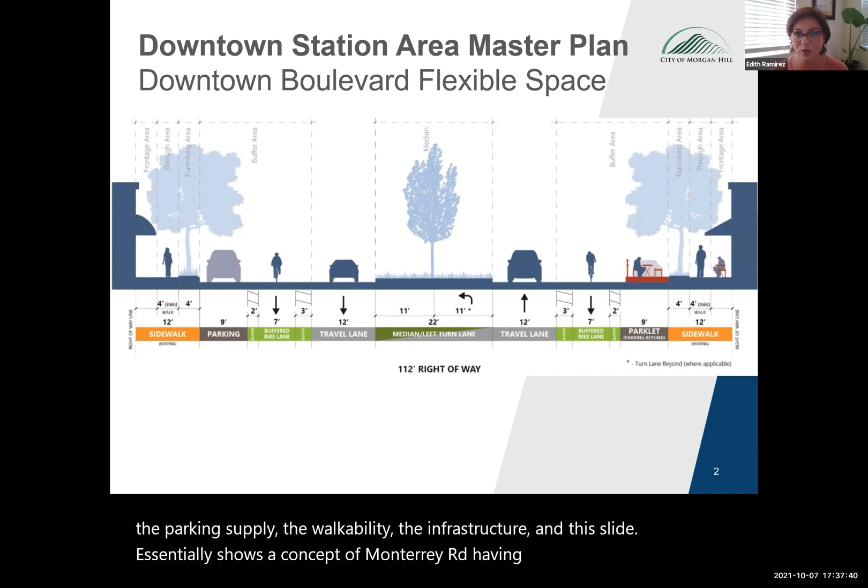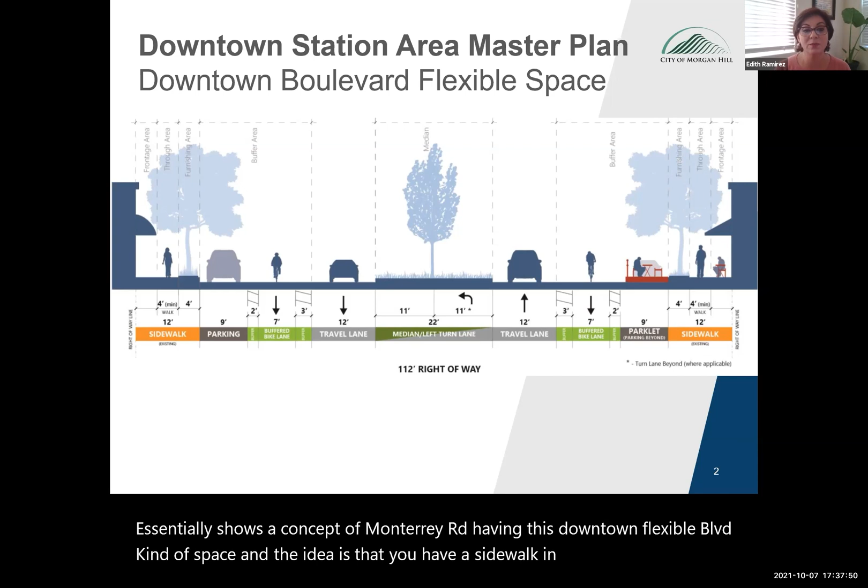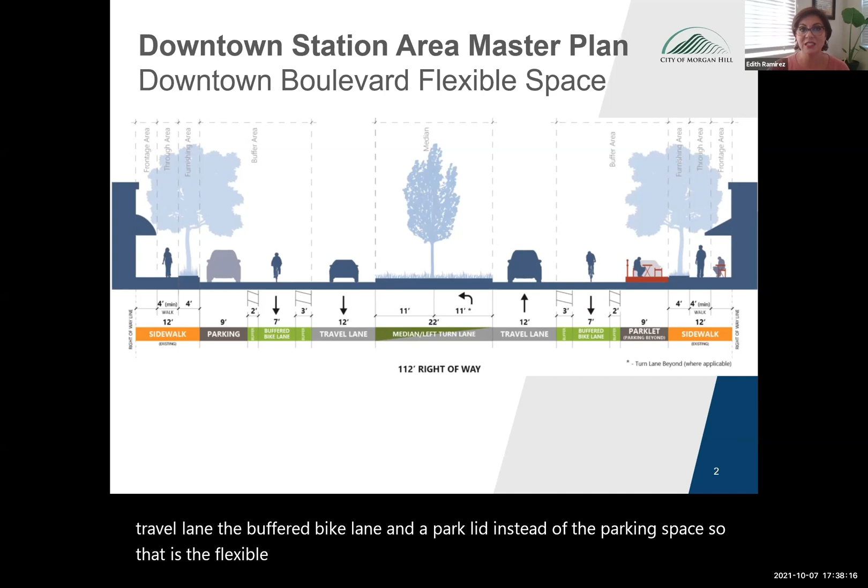And the idea is that you have a sidewalk in areas, you have parking, and then next to that, a buffered or protected bike lane, and then the travel lane with the median in the middle. Alternatively, if you continue through the spectrum, you could have the travel lane, the buffered bike lane, and a parklet instead of the parking space. So that is the flexible space that the Downtown Station Master Plan identified.

So the project that we are providing an update for is the Downtown Lane Reduction and Beautification Project. The City Council approved and provided direction for staff to begin the design work for a project that improves accessibility, increases safety, creates additional space for community members and businesses.

Additionally, the project is supposed to have a place branding beautification component that creates a barrier between the bike lane or the people lane with the use of trees and planters and other elements to support beautification and consistency through the downtown. We can accomplish this project by having some guiding principles that we shared with the council.

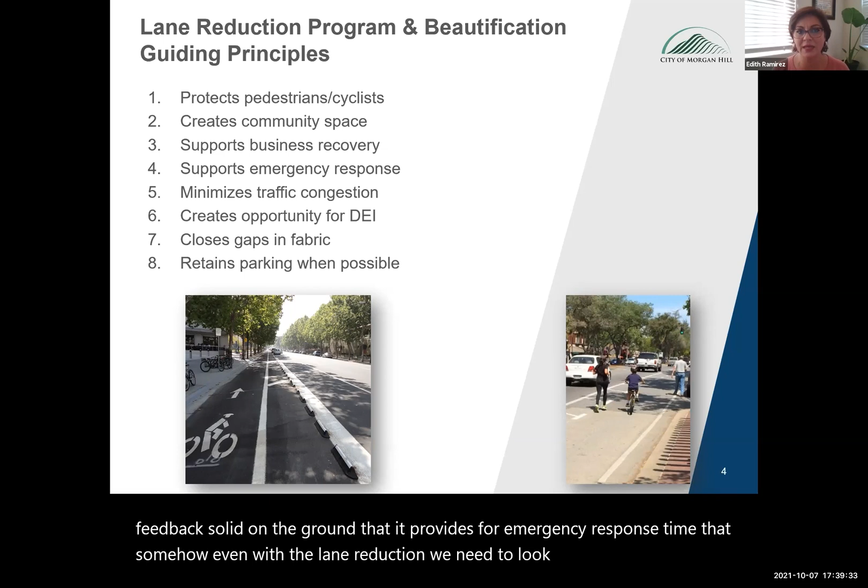A project that protects pedestrians and cyclists, creates community space, also supports the businesses that are trying to get their feet back solid on the ground, that it provides for emergency response time, that somehow, even with a lane reduction, we need to look at how to minimize traffic congestion and create opportunity for diversity, equity, and inclusion throughout the district.

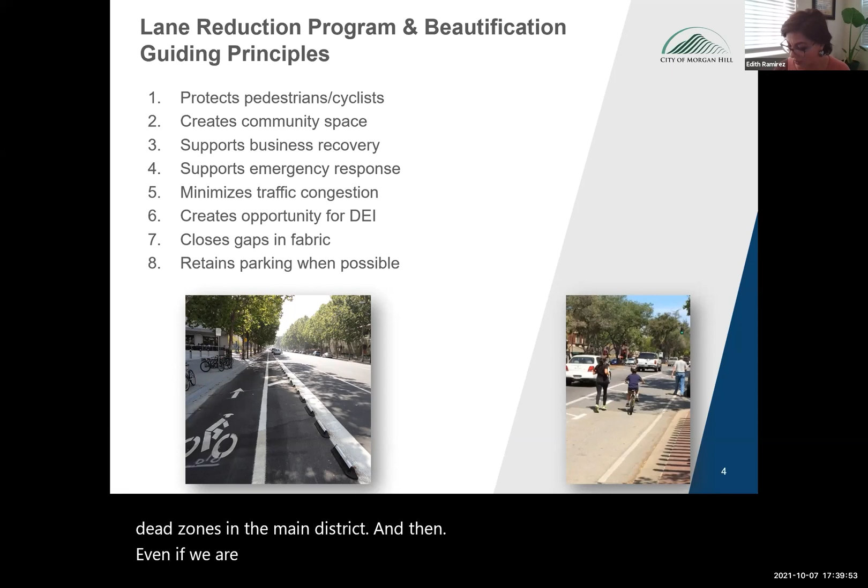Find ways to close the gaps where we don't have retail and there's dead zones in the main district. And then even if we are creating parklets and community space, how do we retain as much parking as possible?

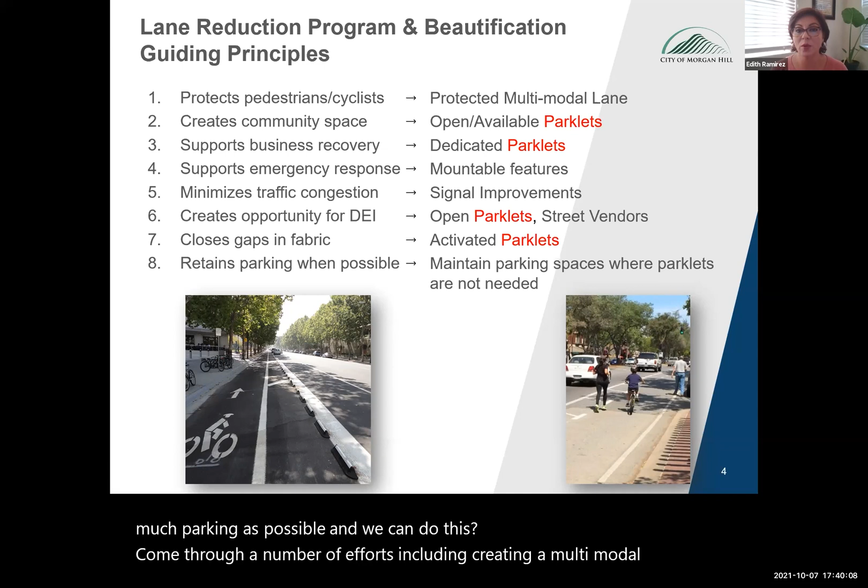And we can do this through a number of efforts, including creating a multimodal lane, open available parklets, dedicated parklets, looking at the way that we implement the project with mountable features so that our emergency vehicles can get through in case of an emergency. We can minimize congestion by looking at our signals and figuring out how we can maximize the traffic flow through the signal network.

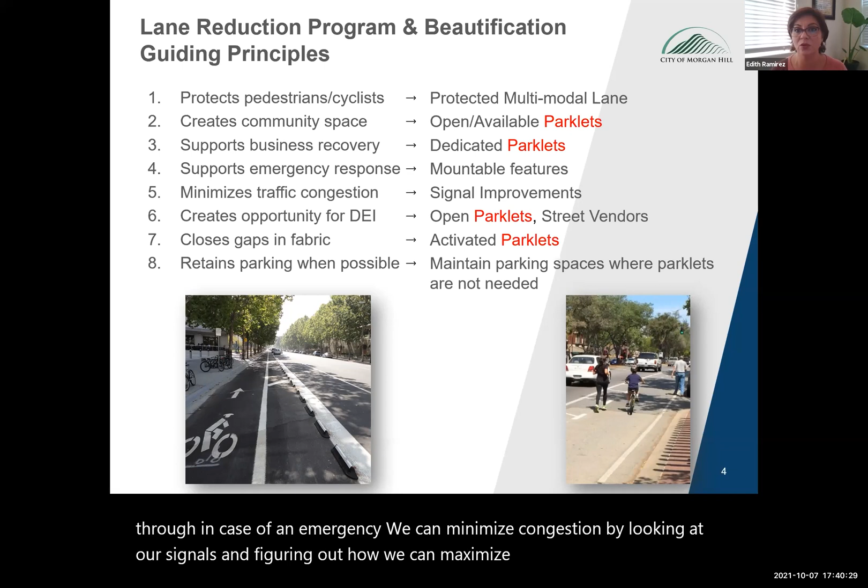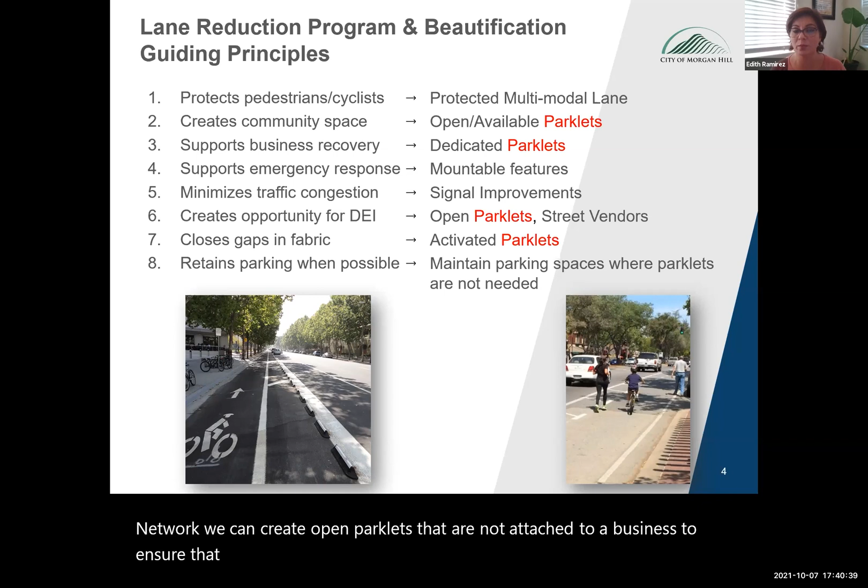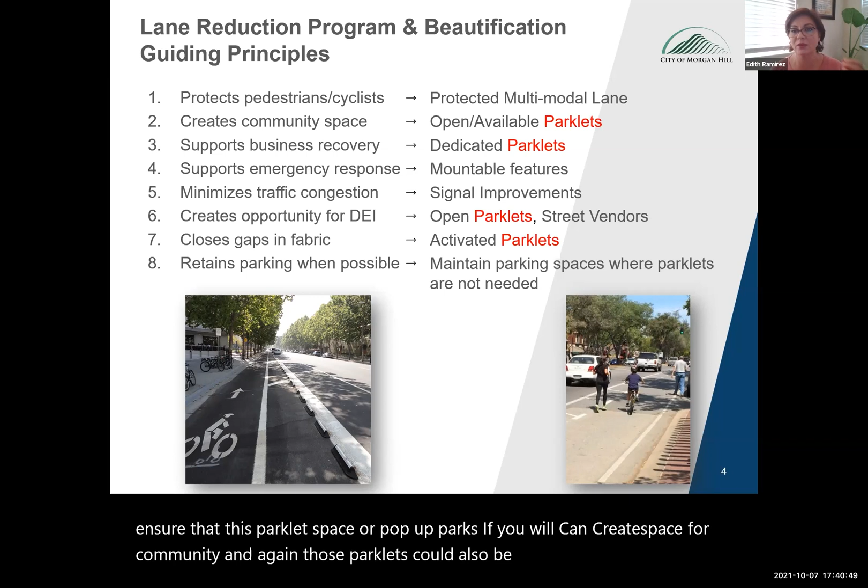We can create open parklets that are not attached to a business to ensure that this parklet space, or pop-up park if you will, can create space for community. And again, those parklets could also be what closes the fabric, what stitches the fabric together when we have the gaps. And again, maintain parking spaces where parklets are not needed.

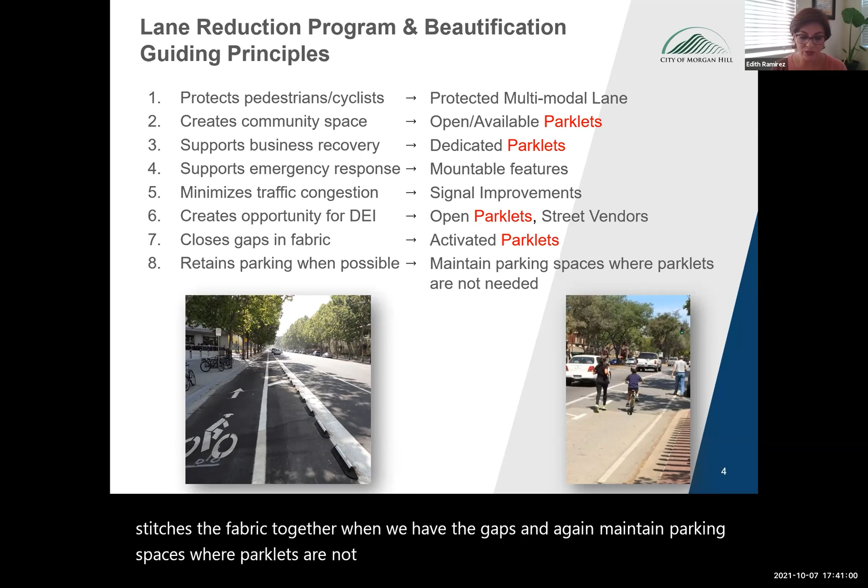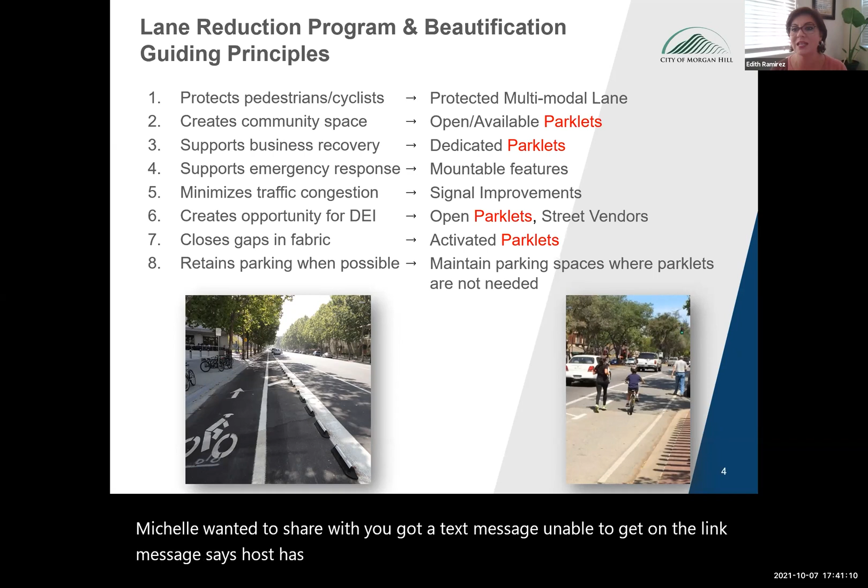Before I go on to the next slide, Michelle wanted to share with you that she got a text message saying she's unable to get on the link. The message says the host has another meeting in progress. I just wanted to alert you to that. Thank you, I just got a text too and was investigating as you were going.

Very good. So on the project scope and timeline, the council gave us the direction to proceed with the project design on May 19 of this year. Staff over the summer has been developing designs with consultants that have been working alongside our team.

And along the way, we started our community engagement, not only through the city's website and our social media channels, but we also put together a working group that is dedicated to work alongside with us as we go through the project mechanics and details.

Additionally, we put together a downtown pizza night for our downtown residents, businesses, and community that came to join us. We had a great attendance at that meeting. And tonight we're having this meeting. We will also have an open house. All of this to get us to a set of recommendations that will go to council in December.

The working group that is working hand in hand with us is a group of almost 30 residents, business owners, and property owners. They come from different perspectives, very diverse opinions in the group, but we are having a very healthy conversation.

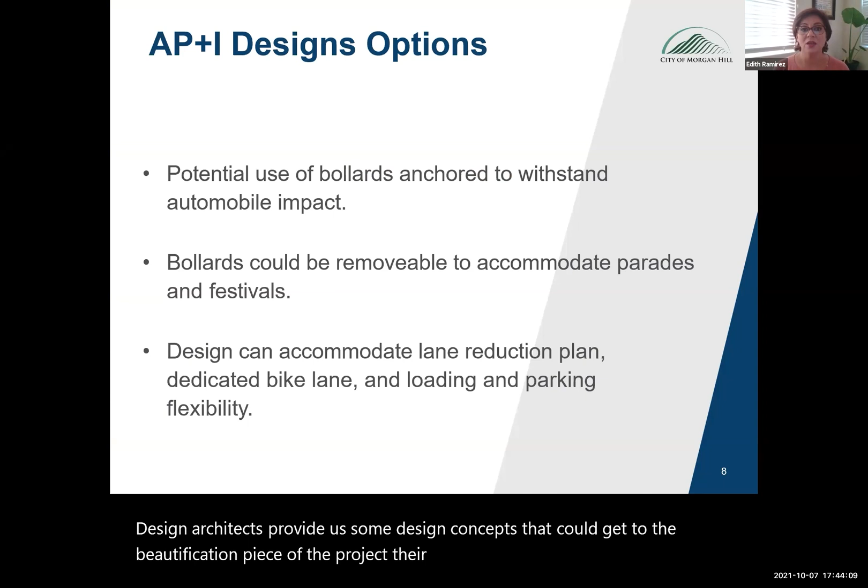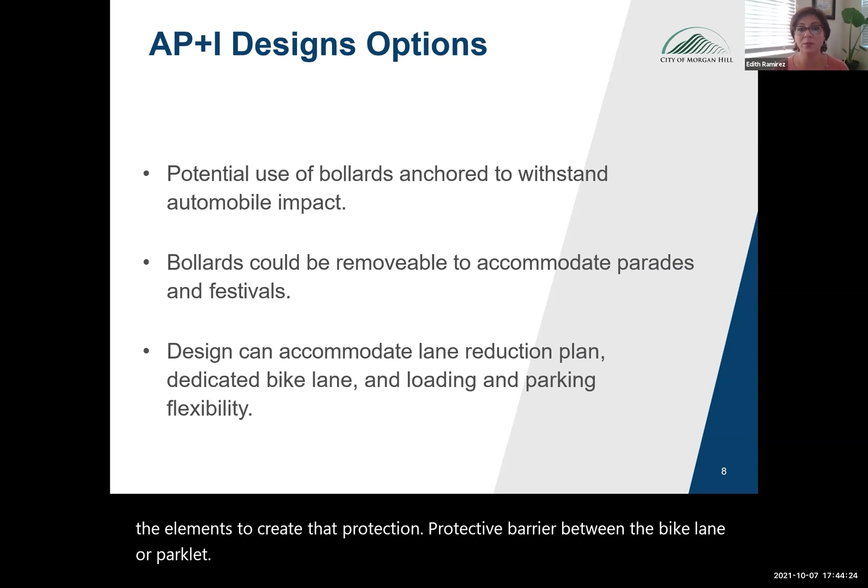Their initial designs use bollards as one of the elements to create that protective barrier between the bike lane or parklet. It doesn't have to be a bollard, but right now that is one of the designs they're proposing. These bollards could be removable and could accommodate parades and festivals if we want more flexibility throughout the downtown. The design can accommodate lane reduction as well as a dedicated bike lane and loading and parking flexibility.

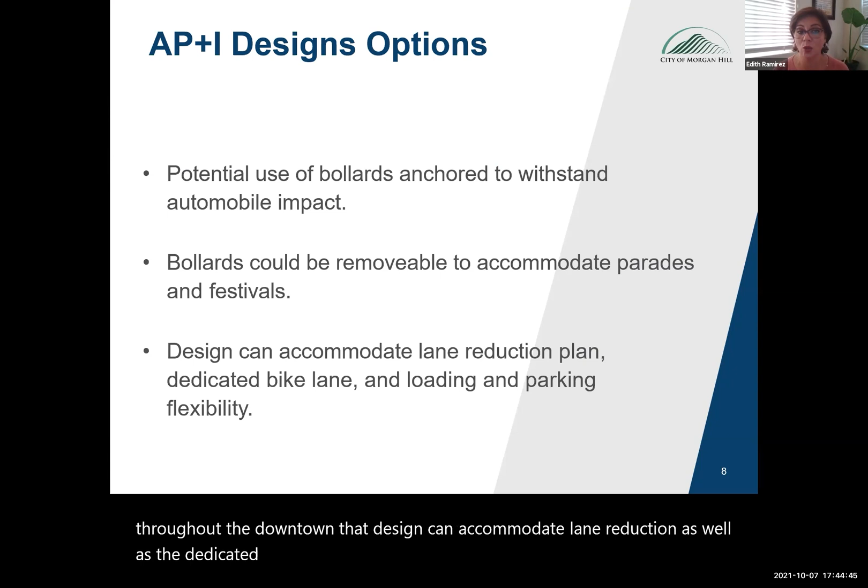So what I'm going to show you now is some designs. This is again high level, just to show you what we're thinking, some of the conceptual stuff.

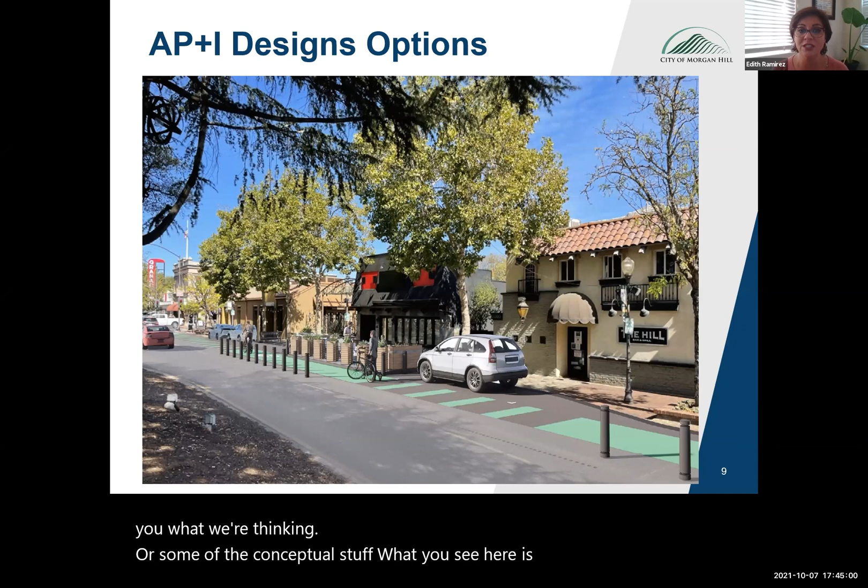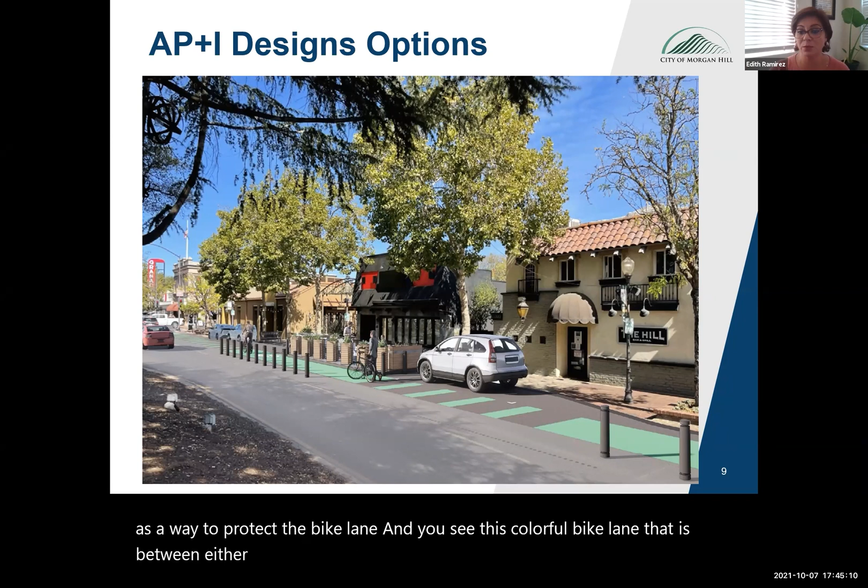What you see here is again the use of bollards as a way to protect the bike lane. And you see this colorful bike lane that is between either parking or a parklet space. This is another concept, just using a different type of bollard mechanism, but again providing flexibility for both the integration of parklets and retaining parking or loading zones as needed.

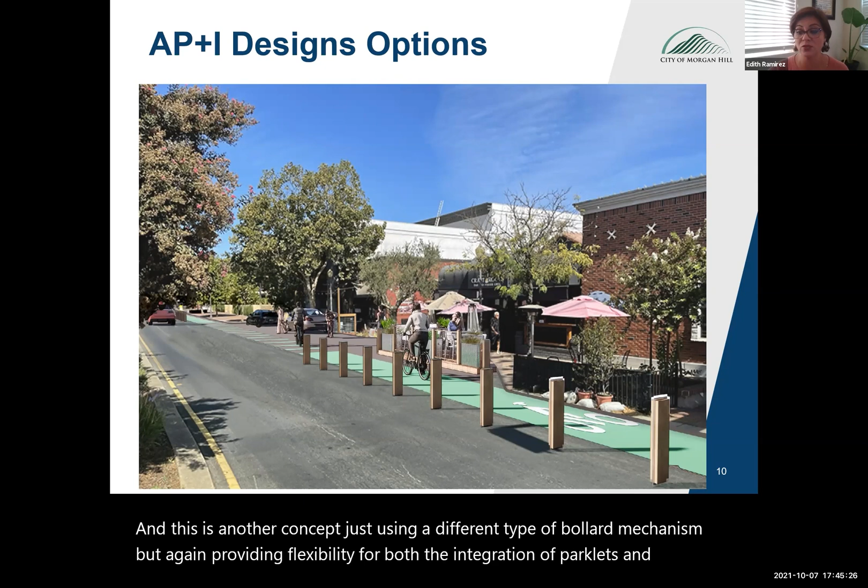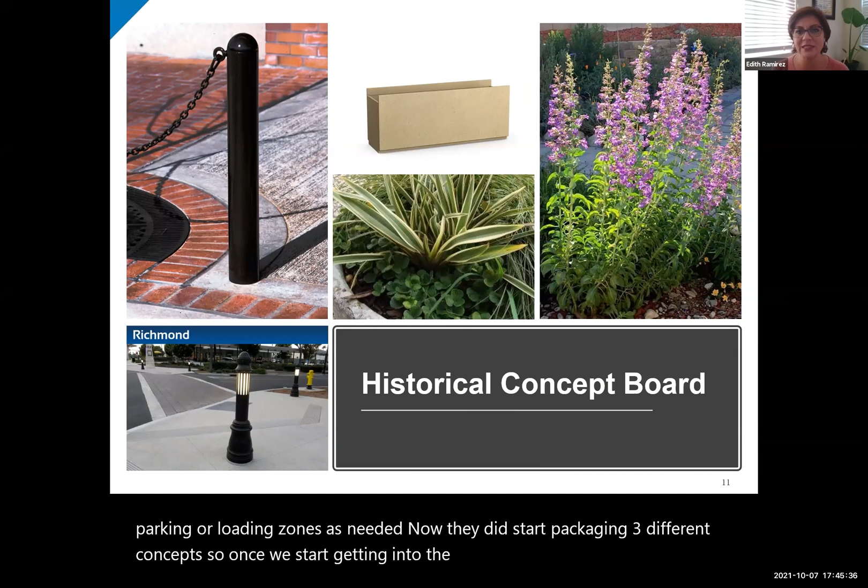Now, they did start packaging three different concepts. So once we start getting into the parklets and designing parklets, one of the ideas is how do we create consistency throughout the district? And what should be the theme, if you will?

So one of the concepts is a historical concept. You can see the features they're using with the concrete planters and this more historical bollards, and a certain type of palette of plantings.

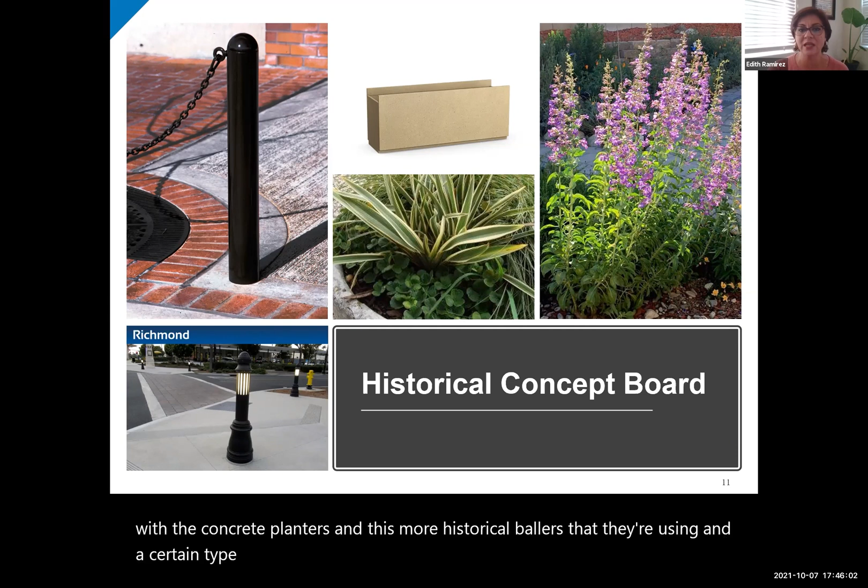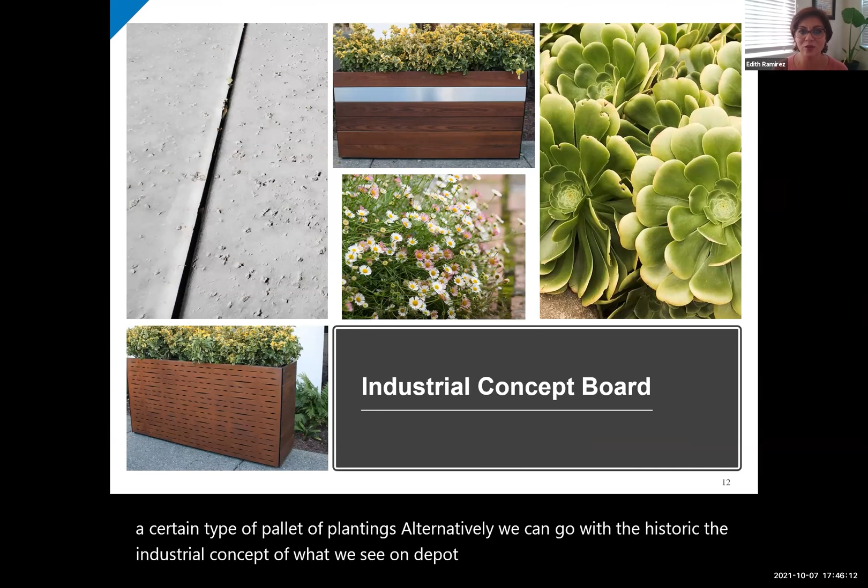Alternatively, we can go with the industrial concept seen on Depot Street, using more metal or corrugated metal, a different type of concrete features and different plantings. Or we can go with an agricultural approach, using more wood and again different kinds of plantings to create that theme throughout the district.

So at this point, that's where we're at with our learning and the conversation. Our next working group meeting is this Friday, and then we're turning the chapter to talk more about the mechanics of the lane reduction, the implications to traffic, and potential mitigations of the project.

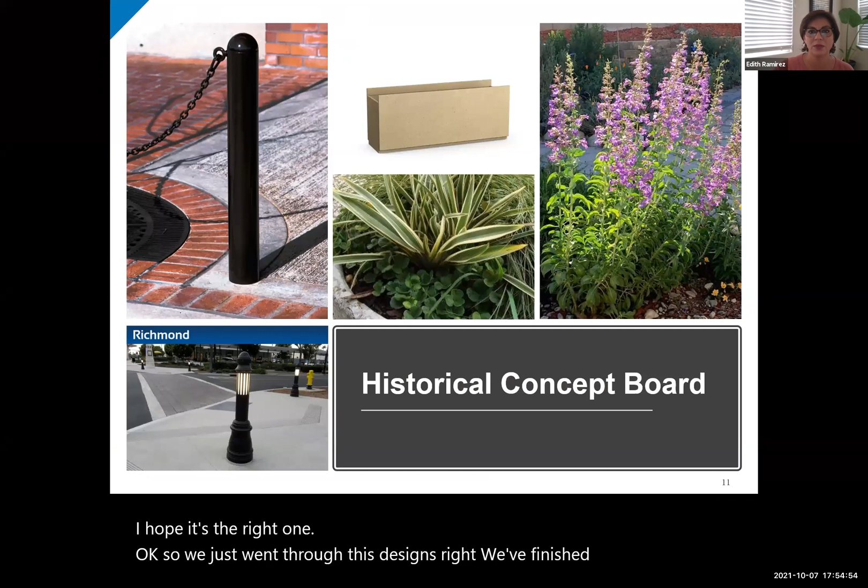Okay, so we just went through these designs, right? We finished the conceptual designs by AP+I. That's where we're at. And now, as I was mentioning, the next part of the conversation is to understand the lane reduction and the traffic implications and mitigations. So we don't really have much more technical information to share. I had already mentioned that we're looking to finalize the work and come back to council in December. In the meantime, we wanted to ask your thoughts and opinions.

We had this exercise at a downtown pizza night, and it was a very healthy conversation. We asked the community, what do they like best about downtown? What is working? What do they like least about downtown, or what is not working? And then what do they see as the major opportunities we have in front of us? So with that, I will invite the group joining us today to share their thoughts on what is working, what is not working, and what they see as the opportunities for our downtown.

Invite you to raise your hand or put it in on the chat. So we don't have the chat open, but you can put it in the Q&A. Thank you.

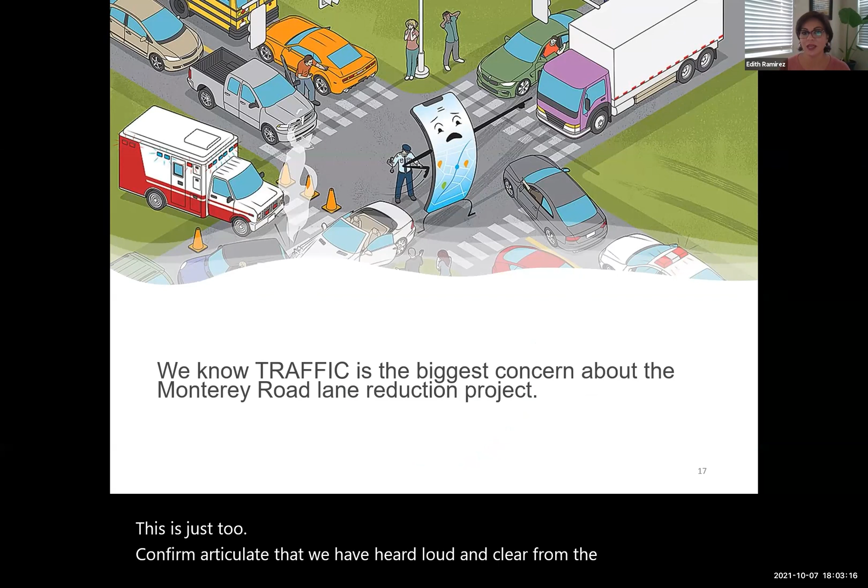This is just to confirm and articulate that we have heard loud and clear from the community that the biggest concern they have about the project is the traffic, the potential added traffic congestion that the project might create with a lane reduction.

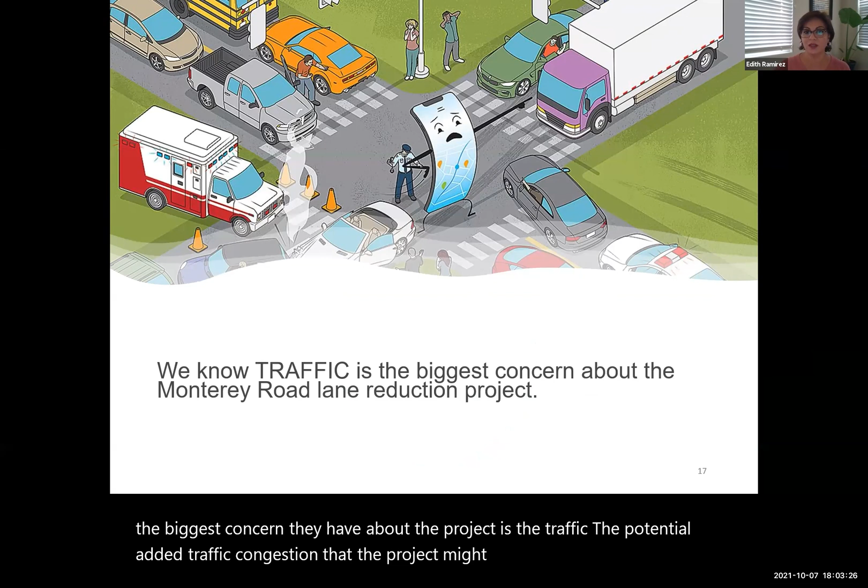So with that, from the city side, we wanted to ask you to help us think through what the city needs to do to ensure that the downtown lane reduction and beautification project works well, and for you to feel good about it enough to support the project. That is a question we've been focused on trying to solve.

That's for Saturday morning during the farmers market. If you want to see downtown in the evening when the restaurants are busy, join us on Wednesday next week, October 13, at 6:30 p.m. We'll meet at La Playa Ice Cream and have some ice cream—come already fed, eat your dinner, then join us for some ice cream. We'll meet at 6:30, and then at 7 we'll do an evening walking tour from 7 to 8.